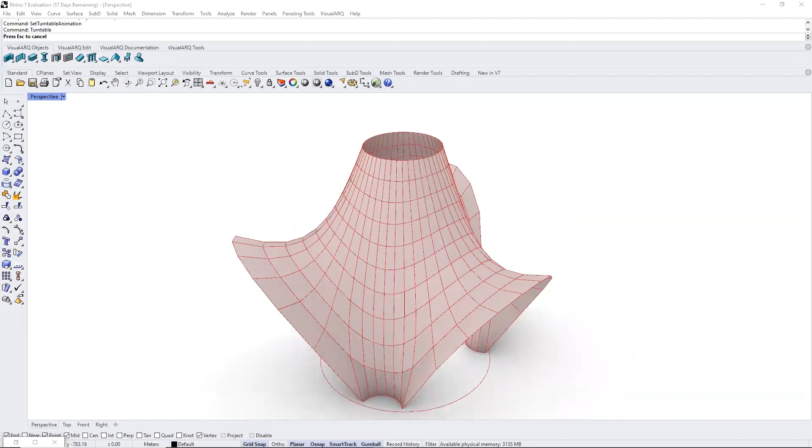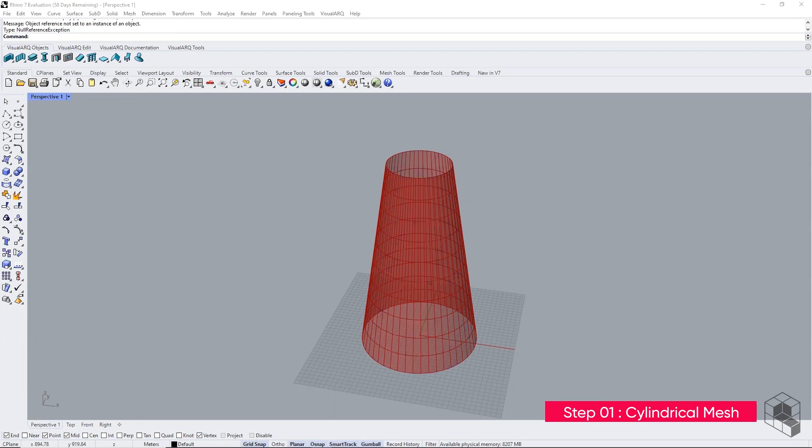In this video, we will learn to design this pavilion geometry, and set up a parametric definition to make several iterations of this form. Before we start building the definition, let's cover the steps and goals required to design something like this. We start with a cylindrical mesh with varying radius at the top and bottom.

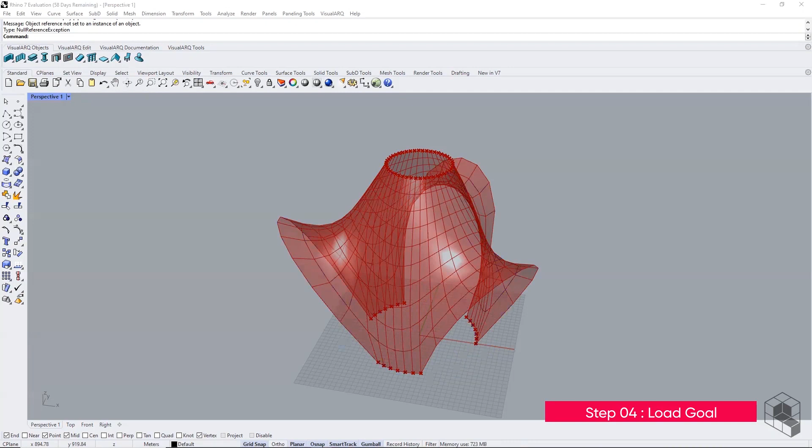Isolate the list of naked points. Anchor the points on the top, and a few points on the bottom. Points on the bottom are split into two lists of anchor and non-anchor points. The non-anchor points are displaced using multiple load goals to create the entrance archway, while the bottom anchor points are anchored onto an arc, in the opposite direction, to arrive at the final form. The remaining mesh is relaxed between these fixed boundary conditions.

Let's begin with the definition. You may open the Grasshopper file provided in the resource folder to follow along. Set the drawing units to centimeters.

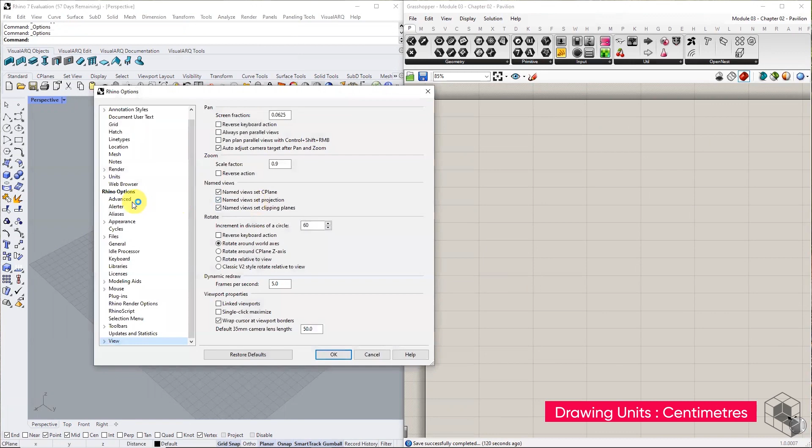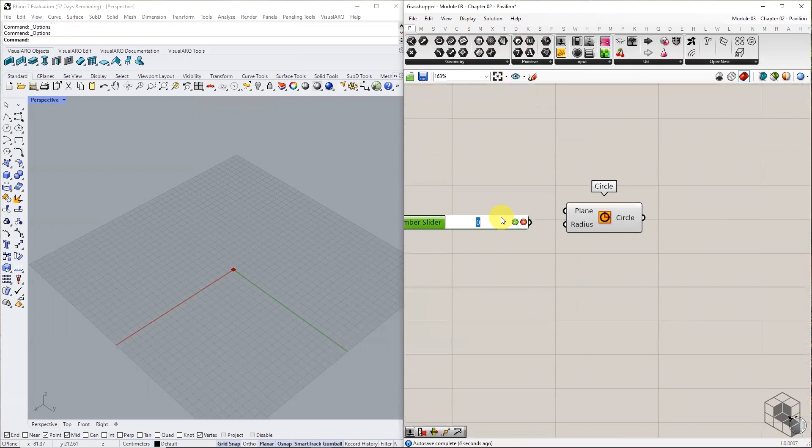The first step is to model the cylindrical mesh. Draw two circles, one at the default XY plane with radius 150, and the second circle at 400 units above the default plane, with radius 60 units.

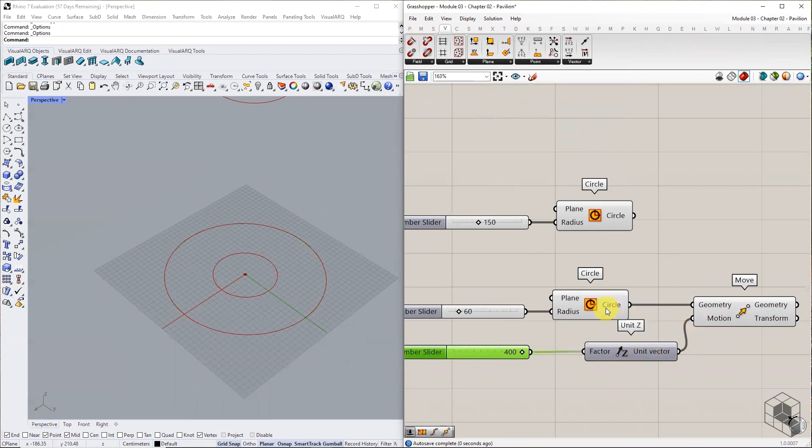Divide both circles into 48 segments using the divide curve component. Note that we are using the number 48 here because it's a multiple of 3. We will be bifurcating the bottom points into 3 lists, out of which some points will be anchored, and some will create the entrance archway. If the objective is to create 4 archways, then the division count should ideally be a multiple of 4.

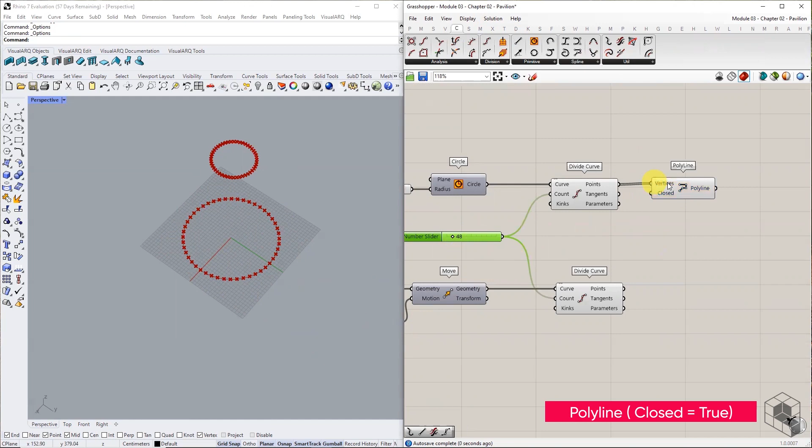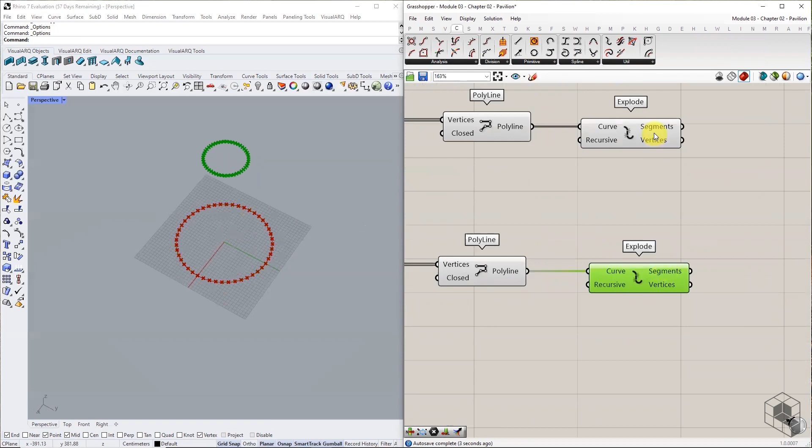Join these points using the polyline component, with the closed parameter set to true. Explode these two polylines to get 2 lists of line segments, with 48 lines in each. The vertices output gives the list of naked points to be used for anchor and load goals.

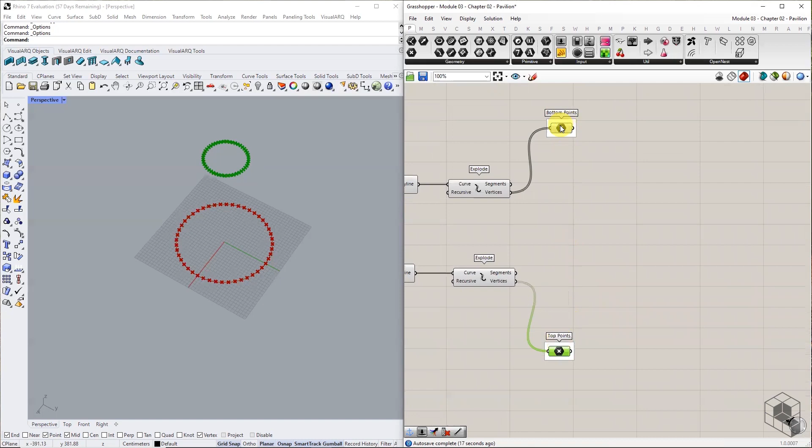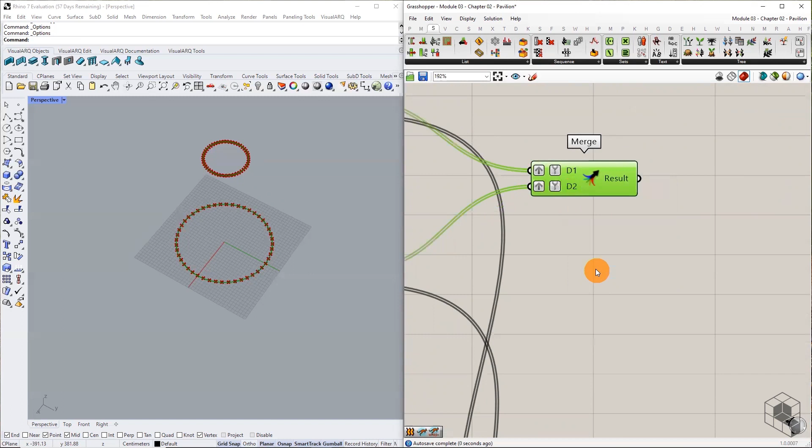Merge the two lists to pair the respective indices from both lists into separate branches. This is done by grafting, and simplifying the inputs of the merge component. Now both input data trees have identical paths. The output from the merge component is a list with 48 branches, with 2 item lines in each.

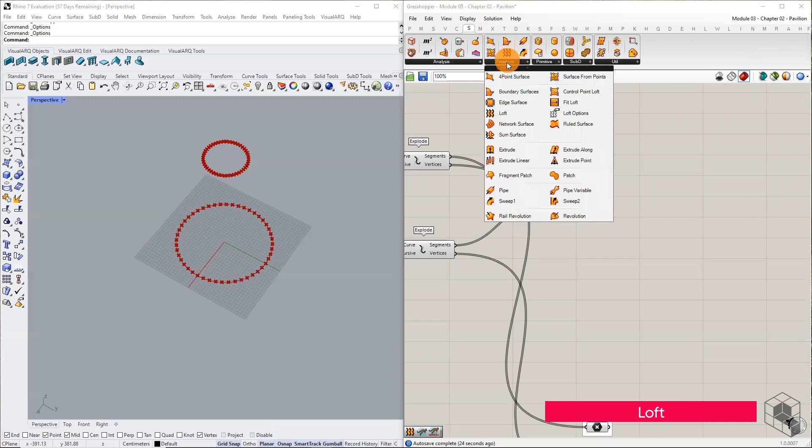Connect the output from merge into the loft component to generate 48 lofted strip surfaces. Use Isotrim, and Divide Domain², to subdivide each strip into 10 smaller surfaces each.

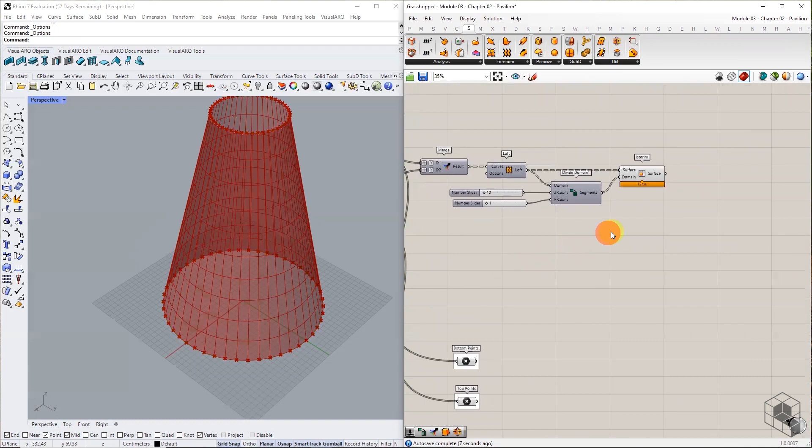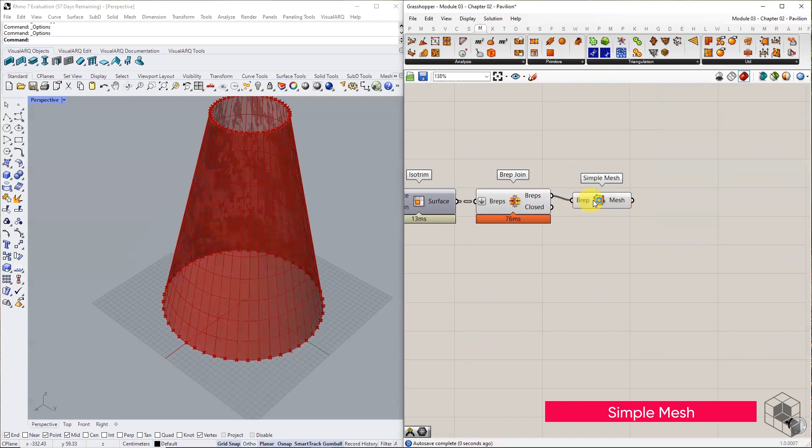Join all these surfaces into a single B-rep, using the Brep Join component. Flatten all B-reps input of the Brep Join function. The resulting B-reps must be converted into mesh, using the simple mesh component, to retain the B-reps topology in mesh geometry.

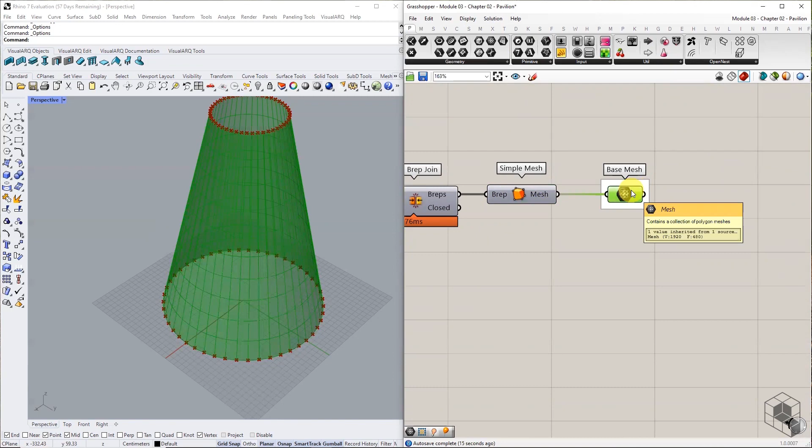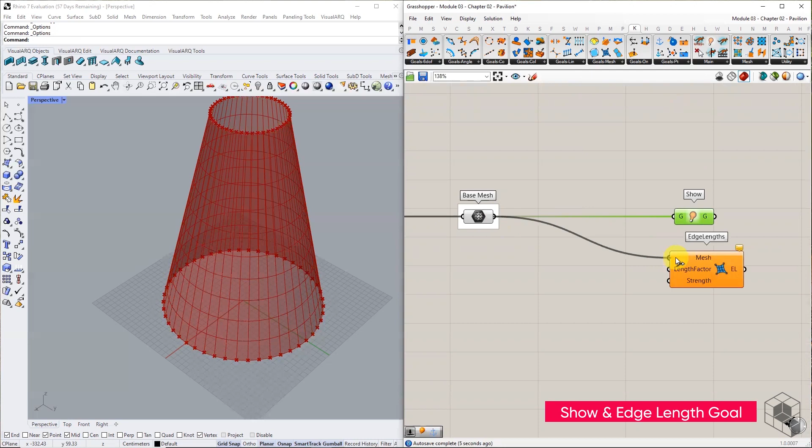Output from simple mesh is the base mesh to be used for simulation. Connect the mesh to show and edge length goals. Set the length factor to 0.1.

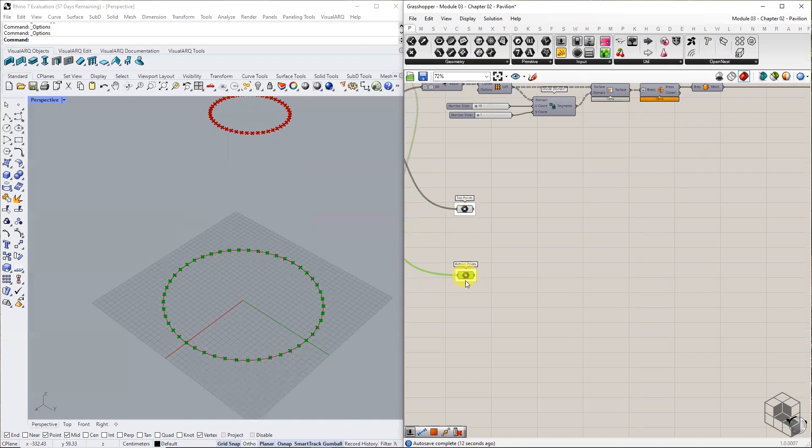Next, we need to assign the anchor goals. Find the two sets of points, identified during the explode step. These points are derived by exploding a closed polyline curve, and the first and last point on this list is duplicate.

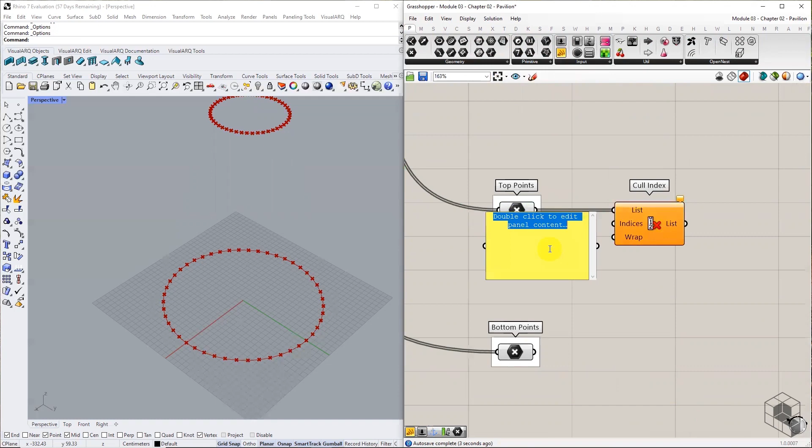Remove the first point in both lists using the cull index function. Both lists should have 48 points. Out of the two sets of points, the points from the top curve are anchored in position. Use an anchor goal to set up the top anchor.

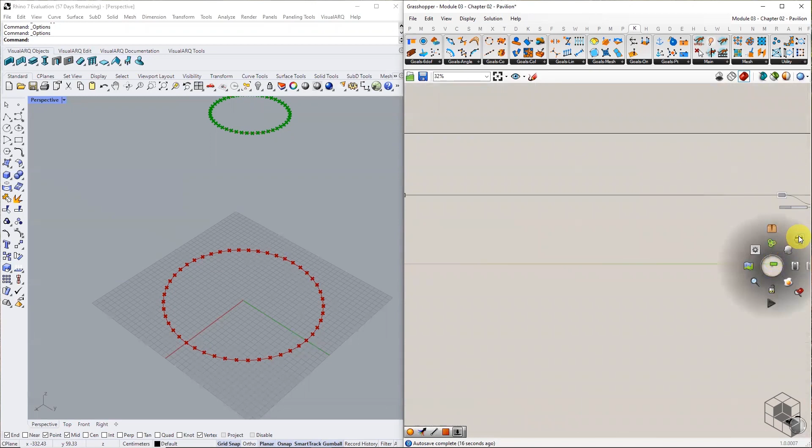For the bottom points, we will start by partitioning the list into 3 branches of equal sizes. Use the partition function, and set the size parameter to 16. Better yet, use the list length function, to get the number of points in the list, and then divide by 3.

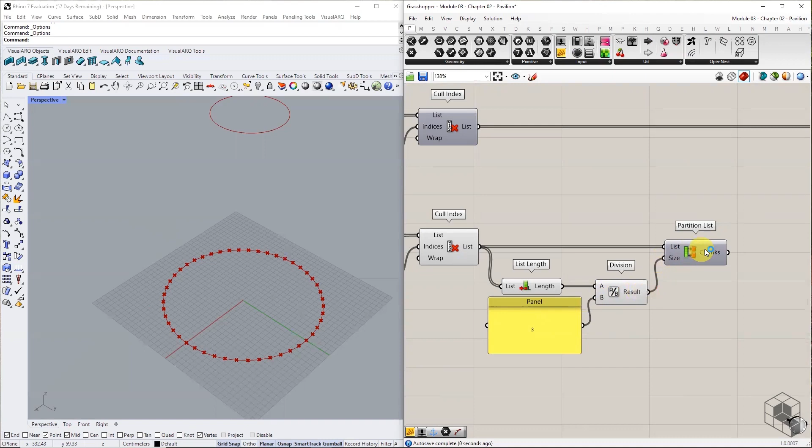We use the number 3 as denominator, because it is the number of archways intended. Connect the result to the size input of the partition list function. This returns a data tree consisting of 3 branches, with 16 points in each. Use PointList to visualize the order of these bottom points.

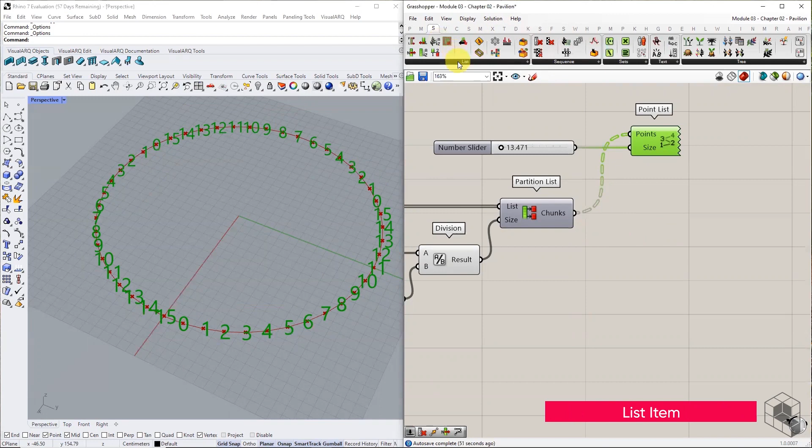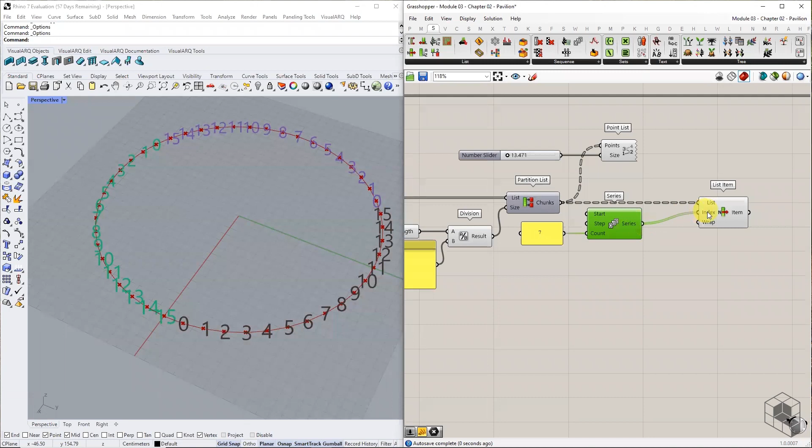Let's choose the first 7 points to anchor for each branch, and the remaining 9 points for the archway. Use list item to extract index 0 to 6 from the partition list output. This step extracts the first 7 points from each branch of the partition list output.

Connect these points into a point container component, and tag them as anchor points. This data tree should have 3 branches with 7 points in each.

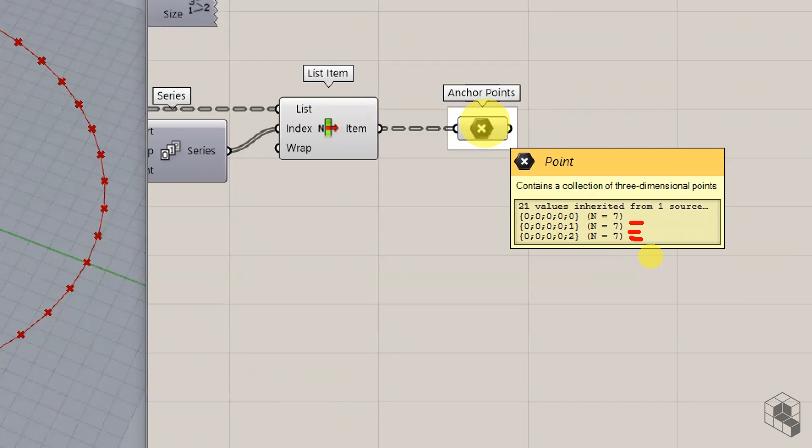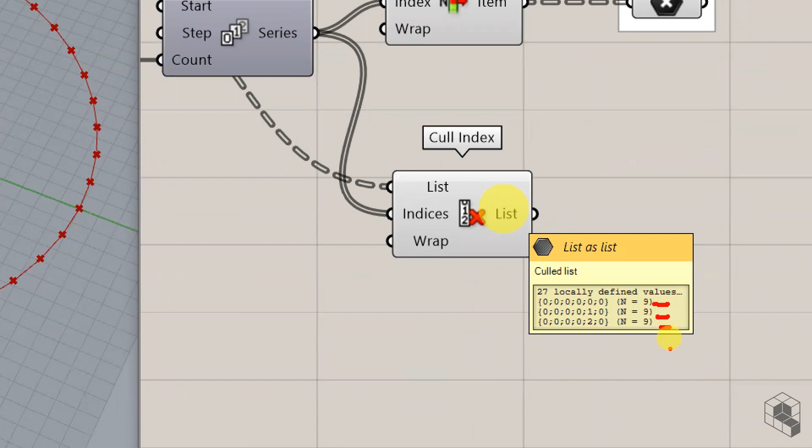Extract the remaining points by connecting the partition list output to the cull index component, and cull index 0 to 6. This returns a data tree with 3 branches, and 9 points in each. Connect these points into a point container component, and tag them as load points.

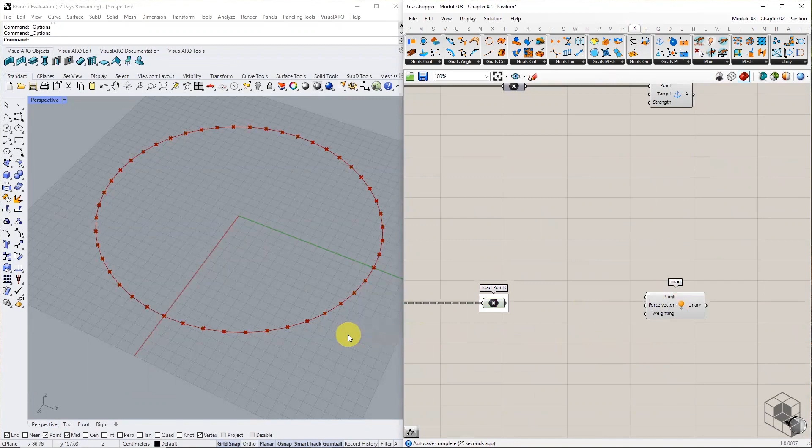For load simulation, 2 separate load goals will be used to create the archway. The first one will translate the point in the Z direction, and the other will move it away from the center, or the origin in this case. Set up the first load goal with the Z vector as force vector. Connect a numeric slider to the unit Z vector to change its magnitude.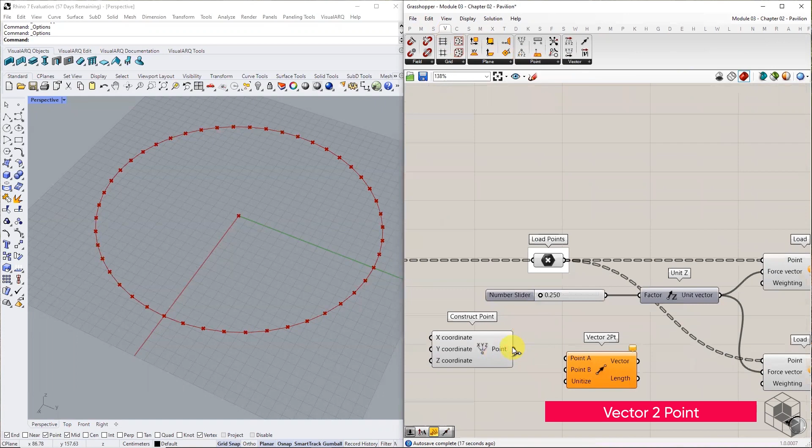Set up the second load goal by generating 2 point vectors between the origin and the load points, and using them as force vectors. Before connecting to the force vector, unitize the input vector, and use a numeric slider to set the magnitude of this vector, using the amplitude function.

This will help in controlling the mesh output by changing the slider.

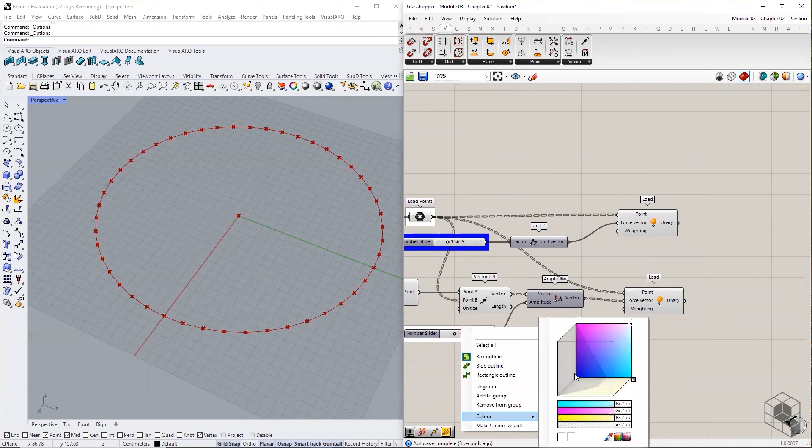To visualize this vector, use the vector display function. The arrow must be pointing away from the center.

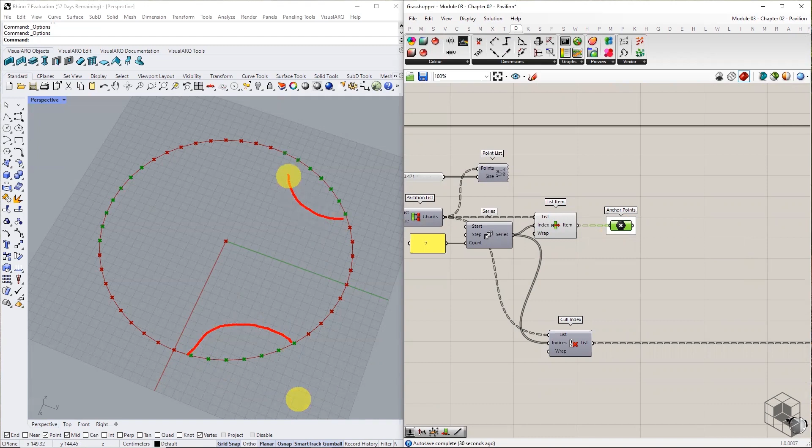The last step in this process is to assign target points for the anchor goal. As an aesthetic decision, we will try to reverse the curvature of the bottom anchor points. This will improve the continuity of form, and the way it meets the ground. It will also present methods of manipulating edges as per design objective.

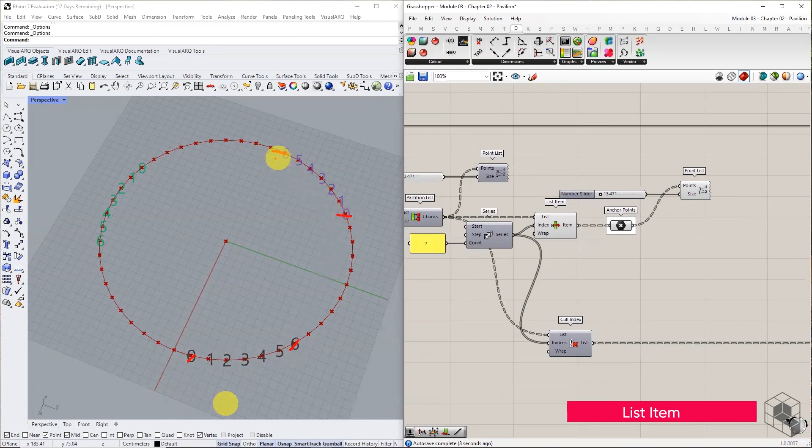Base anchor points are divided into 3 branches. Let's use the point list to visualize their indices. Isolate the first and last point on each branch using the list item, and draw a line between them.

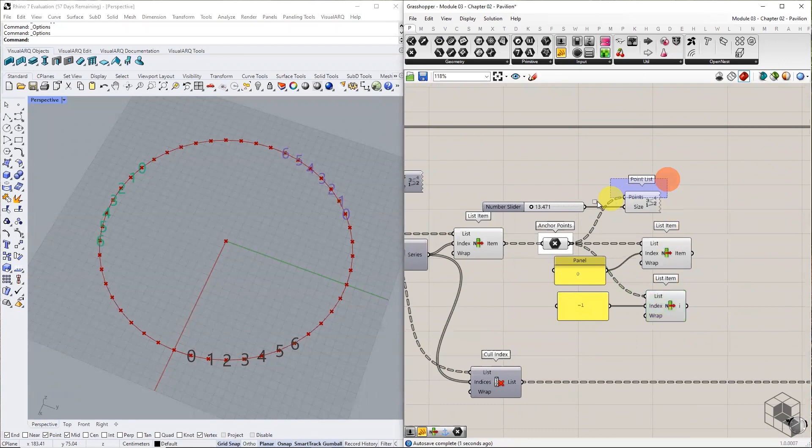Find the midpoint of each line, and draw a circle of radius 50 units.

We need to divide the circle into 2 arcs, and use the inner arc as the target curve for our anchor points. Before dividing the circle, let's move it slightly away from the origin to reduce the size of the inner arc.

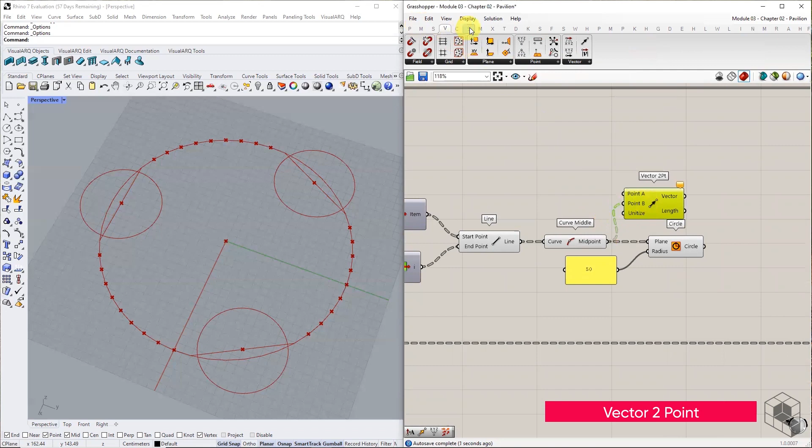Create a vector 2 point between the global origin and the midpoint. Unitize the vector, and set its magnitude to 10 units using the amplitude function.

Use this vector to move each circle away from the origin.

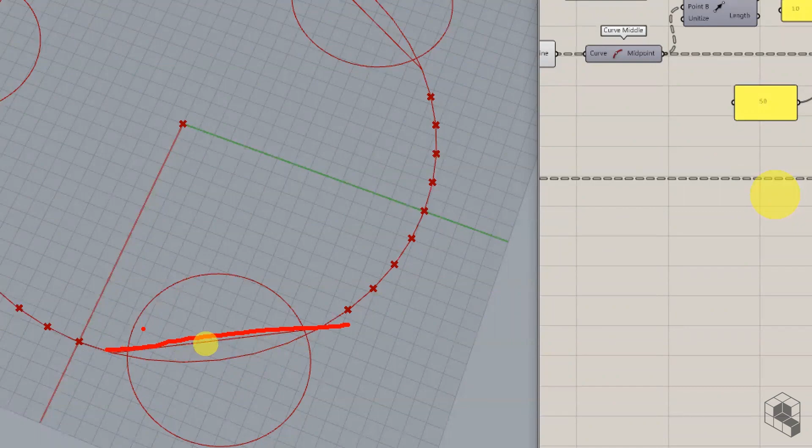To divide this curve, we use these line segments and the intersect curve command. Connect the circles to input curve A, and the lines to input curve B.

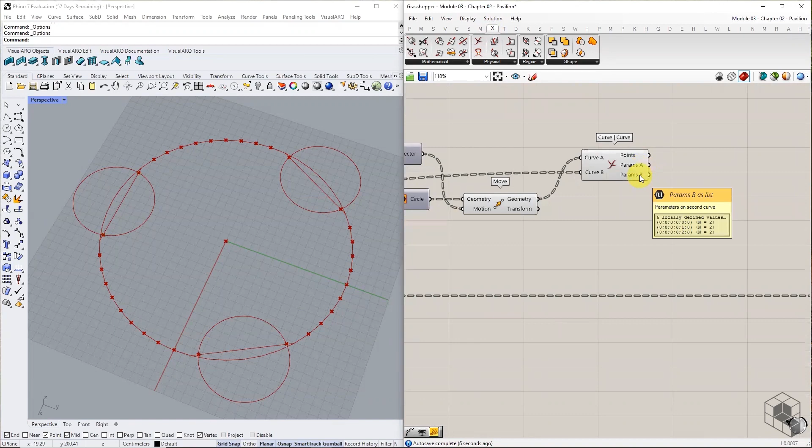This gives us parameters that can be used to shatter the circular curves. Shatter the circles using params B, and we get 2 curve segments for each circle.

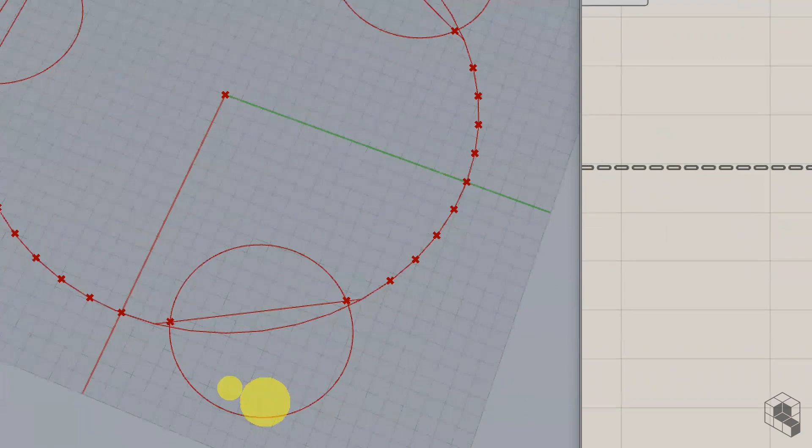To identify which of these curve segments is the inner curve, we can check their length, and the curve with the shortest length would be the inner curve.

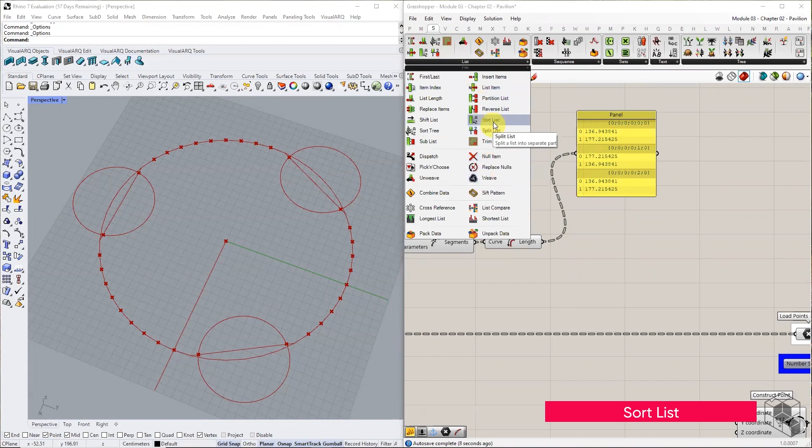Connect the shattered curve to the length component. Connect the length output to the sort component. Also, connect the curve segments to the values A input of the sort component.

The resulting list is sorted as per ascending order of curve length, which means that the first curve in each branch is the target curve. Use list item to isolate the target curve.

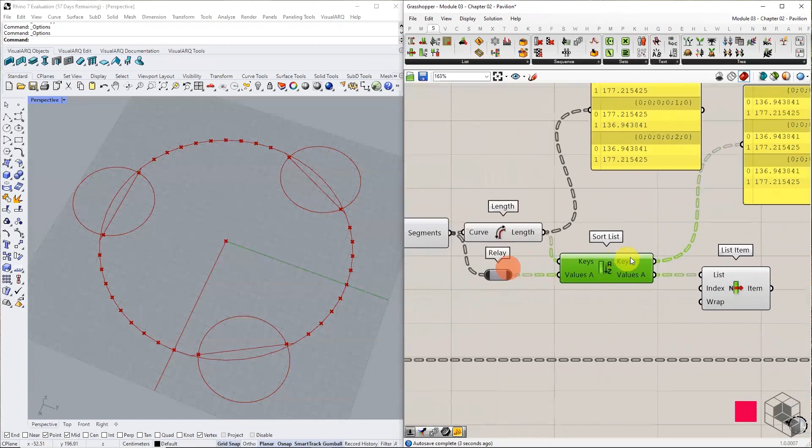Now that we have a list of target curves, and a list of base anchor points, we need to identify the target points for each anchor point.

Firstly, let's align the direction of the target curve with the order of bottom anchor point list. To do this, we will isolate the endpoints of the target curve, and check their distance from the first point of each branch of anchor points.

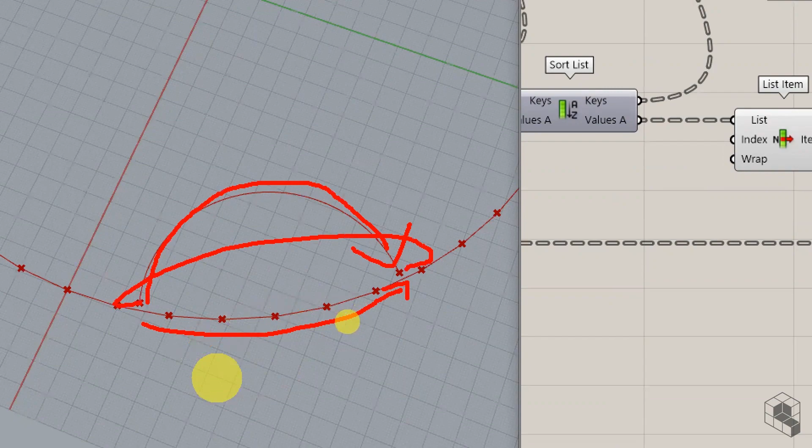If the target curve is aligned with the point list, the distance from start points will be lesser than the distance from endpoint. Use smaller than operator to test this logic.

Resultant Boolean list will be used to dispatch the target curves between aligned and non-aligned curves.

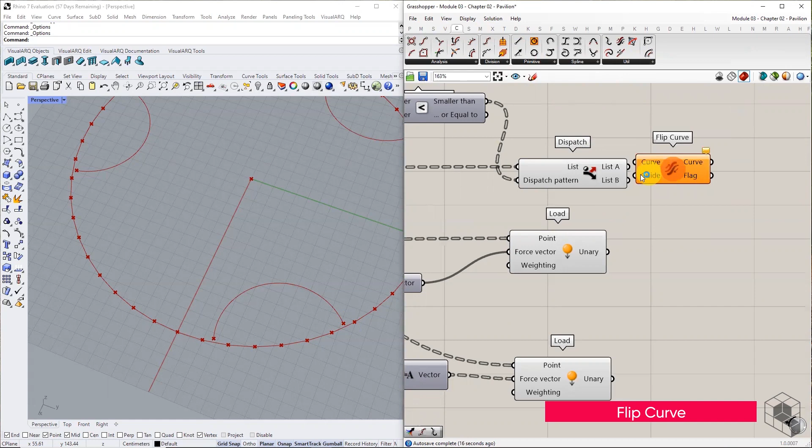List B consists of the non-aligned curves, which must be flipped using flip curve. In this case, all target curves are non-aligned. Output from flip curve function is the list of aligned target curves.

Next, divide each target curve into 6 segments.

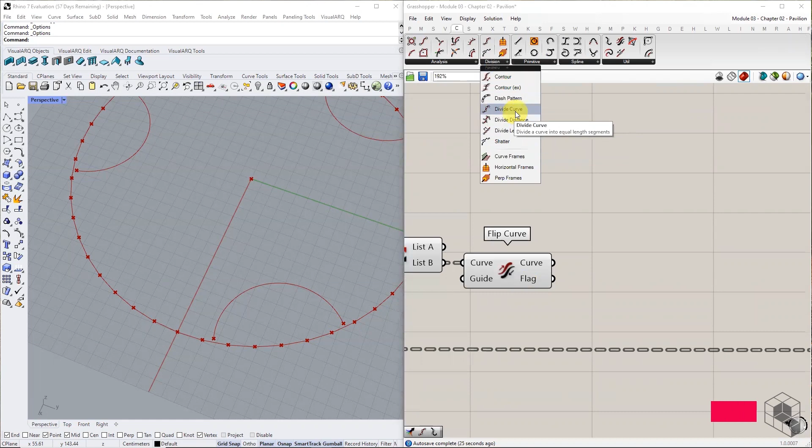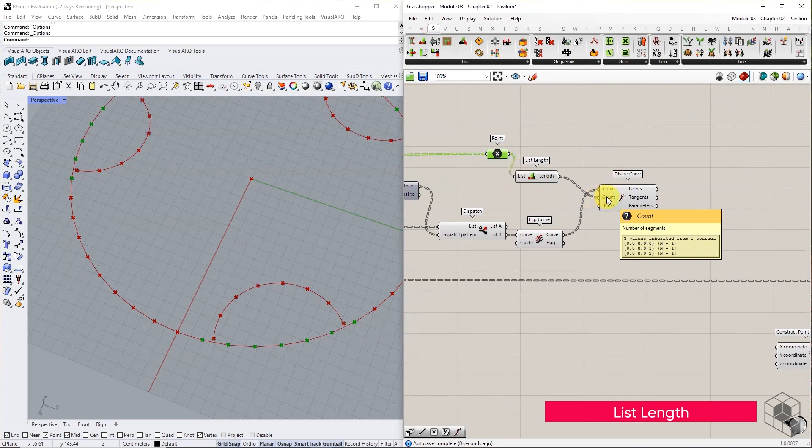You may use the list length component to extract the number of points in each branch. Then use expression x-1 to get the division count. The resulting points list consists of 3 branches, with 7 points in each branch.

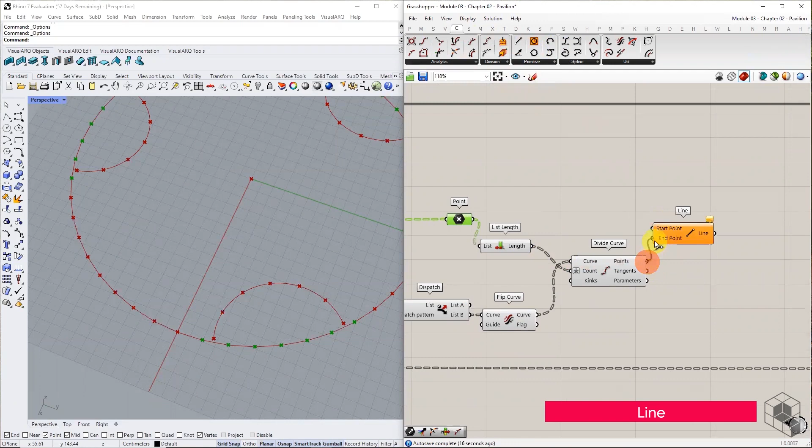Draw lines between anchor and target point to verify the position and index target points list.

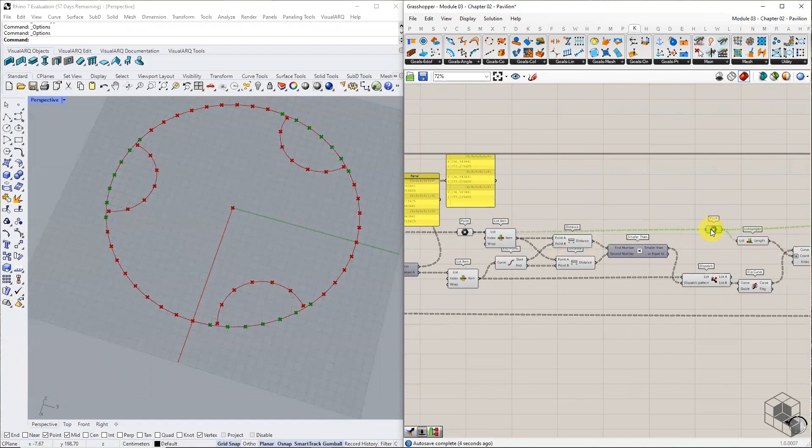If everything is in order, connect these point lists to the anchor goal. Merge all goals, and connect with the BouncySolver.

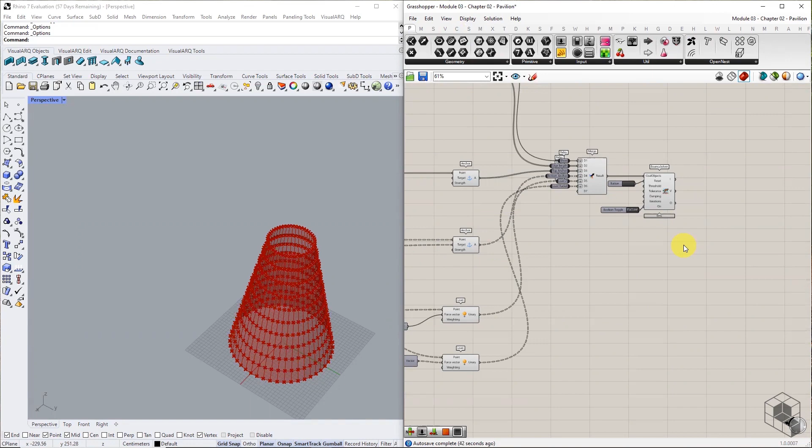Reset, and enable the solver. Use list item to isolate the first item from the output list, which should be the simulated mesh.

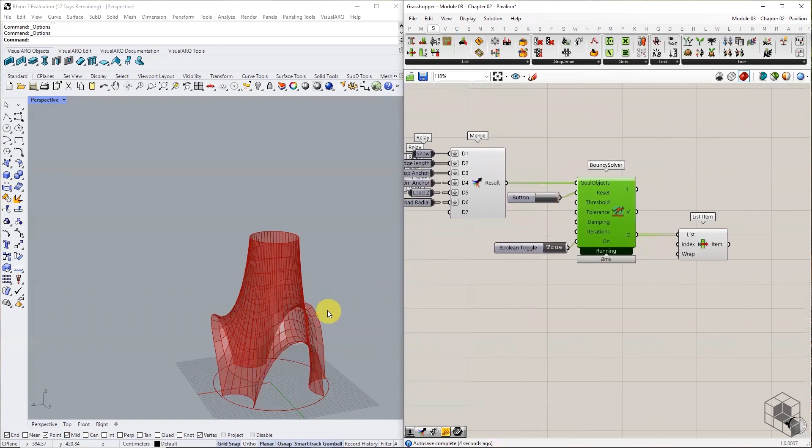The output mesh does not look the way we intended it to be. We must tweak the load goals to improve the proportions. Set the Z load goal to 28 units, and the other load goal to 50 units.

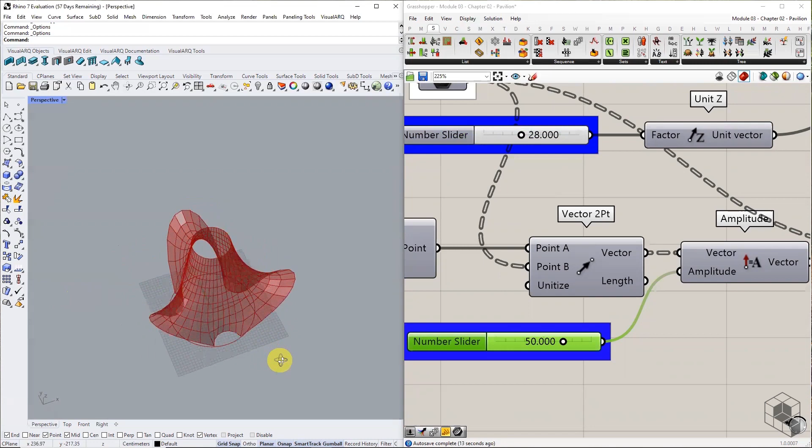Now it is closer to the shape we set out to achieve. As an additional goal, we may add the pressure force to expand the mesh uniformly.

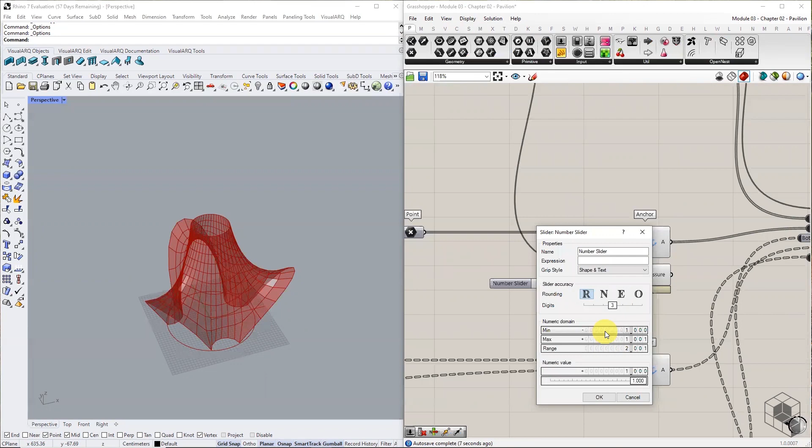Connect the base mesh to the pressure goal, and set the strength to 0.01 units.

Reset the solver, and we see that the mesh geometry expands a bit. And there we have it, a mesh geometry designed as a pavilion.

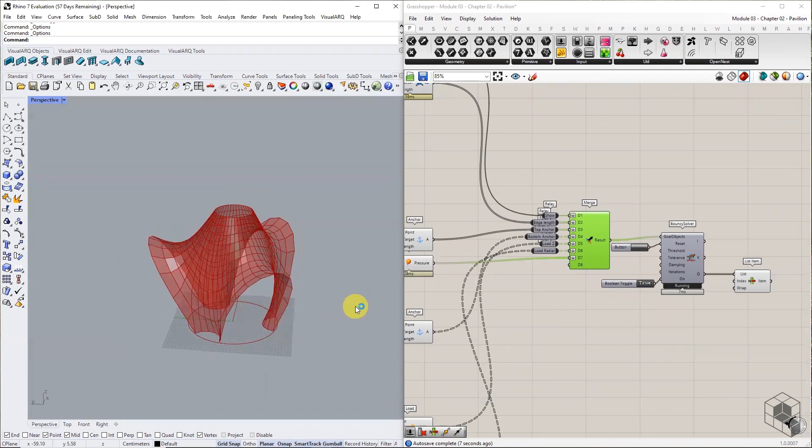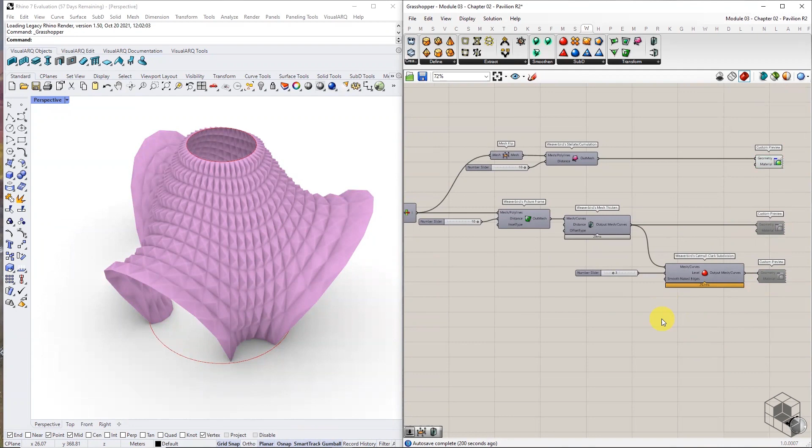This mesh can be further transformed using various mesh-based modifiers. Weaverbird's transform modifiers have multiple options like picture frame, mesh thicken, mesh offset, stellate, etc., to add relevant details as per your design. The reference Grasshopper file has multiple options for quick detailing of the model.

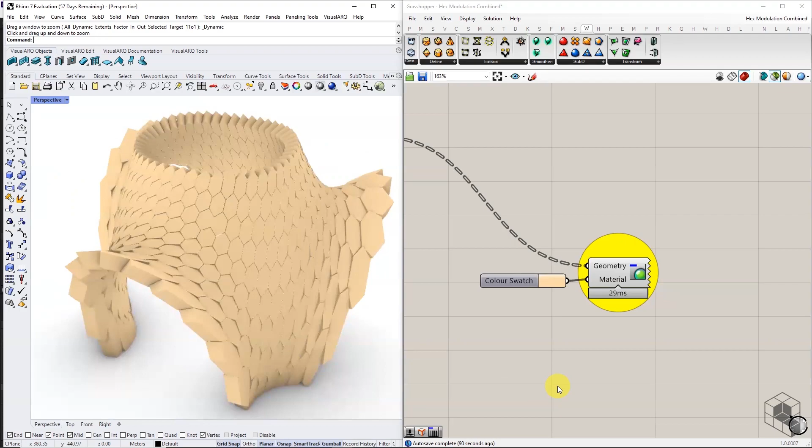Apart from quick transformation modifiers, there are numerous ways to fabricate the form as well. It can be discretized into strips, or use stereotomy to develop optimized and custom brick modules to put it together. Or use the mesh vertices and edges to create a metal structure out of it.

We will explore the strip-based fabrication strategy in Module 04 of this course.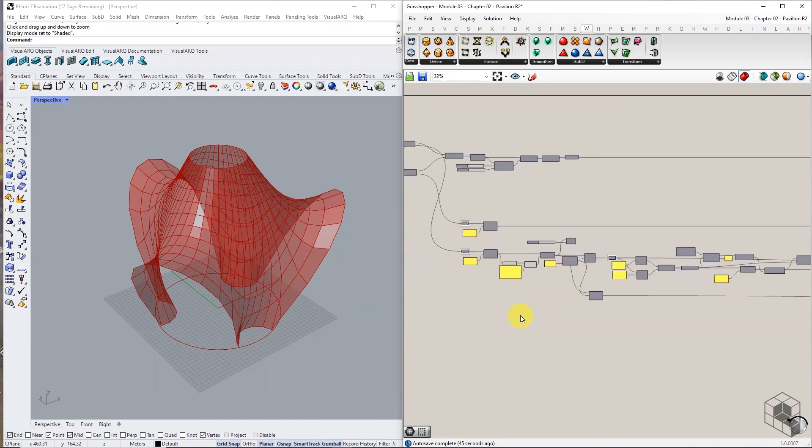As a practice exercise, try to build this Grasshopper definition from scratch, and then vary the parameters to create variable results. For example, to change the number of archways to 4, find the mathematical operator that controls the initial partition of base points, and change the denominator to 4.

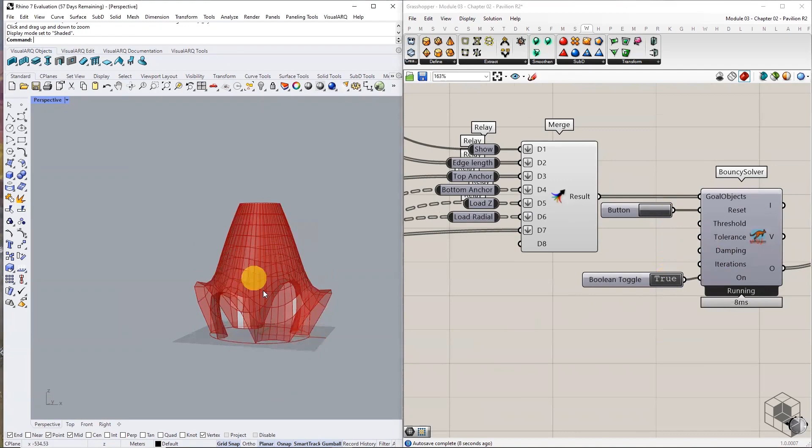Try varying the initial surface division, or the force vector, or the anchor points and document the results.

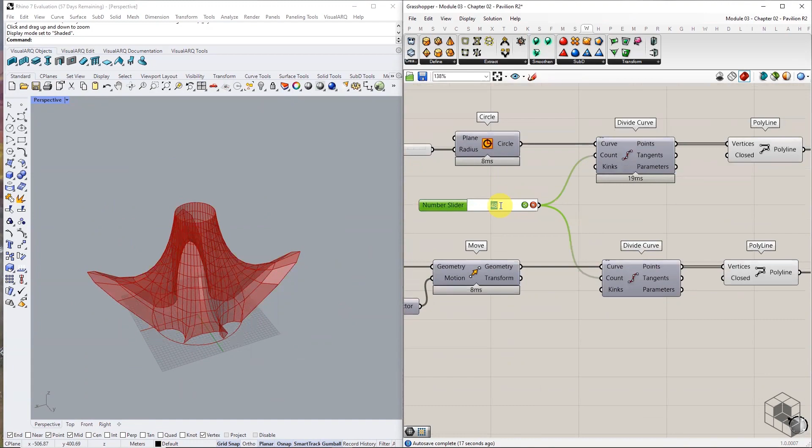The next chapter will cover how to simulate a network of joined vaulted structures.